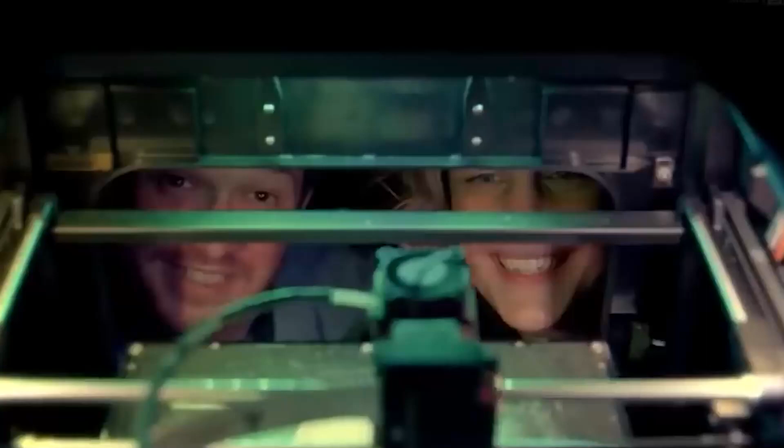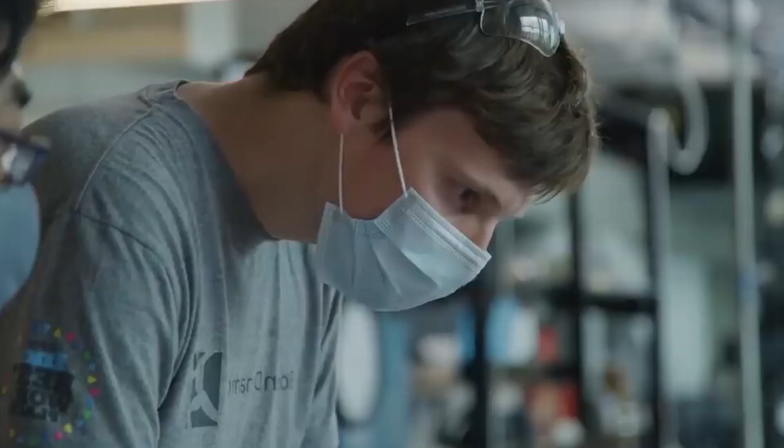What if I told you there's a robot that can run faster than Usain Bolt and navigate through rough terrain with ease? The world of Boston Dynamics is a fascinating one where technology meets art and the impossible becomes possible. Boston Dynamic robots are not just changing the game in the field of robotics, but also revolutionizing industries such as

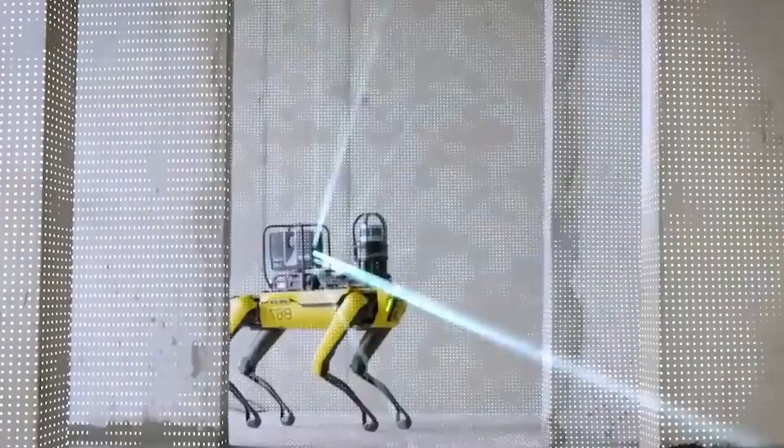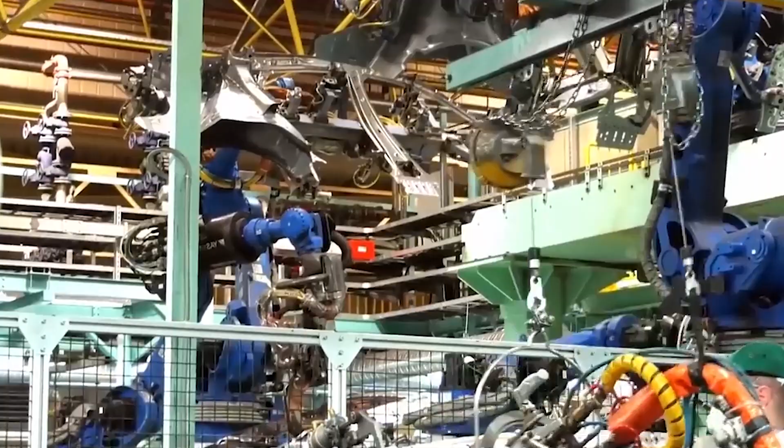construction, search and rescue, health, and even entertainment. Get ready to witness the future of technology as we take you on a journey with the most advanced robots on the planet. So, join us as we explore the revolutionary world of Boston Dynamics robots.

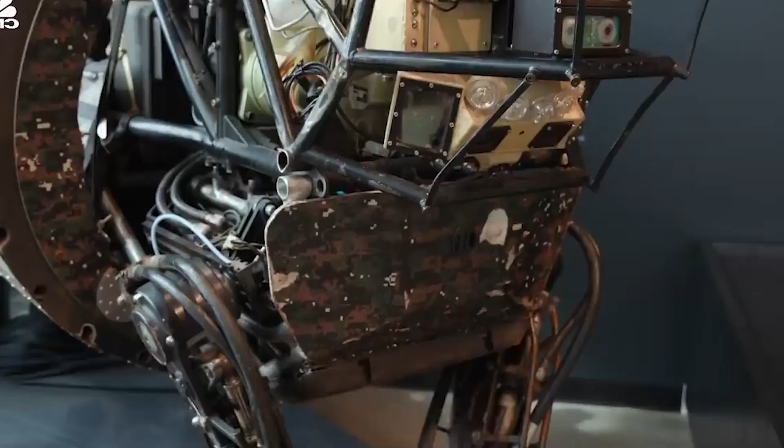Boston Dynamics is renowned for producing superb robots that improve people's lives by creating dynamically stable, leg-powered devices. The robot's unusual design enables them to navigate a terrain that is impassable to others and carry out automatic activities in chaotic settings. The company has created creative robots that have grown incredibly popular over time.

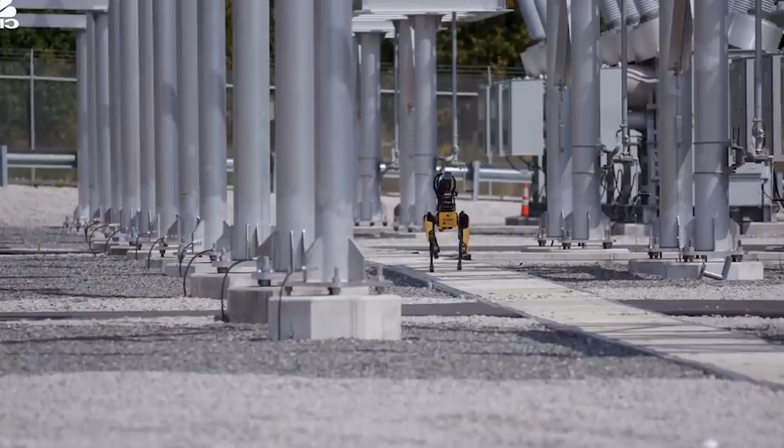For more than 30 years, Boston Dynamics has prioritized research and development. They have been supported for the duration of that time by extremely wealthy investors including Google, SoftBank, Hyundai, and initially the American military through DARPA funds. The results of all that study and creation are beginning to show.

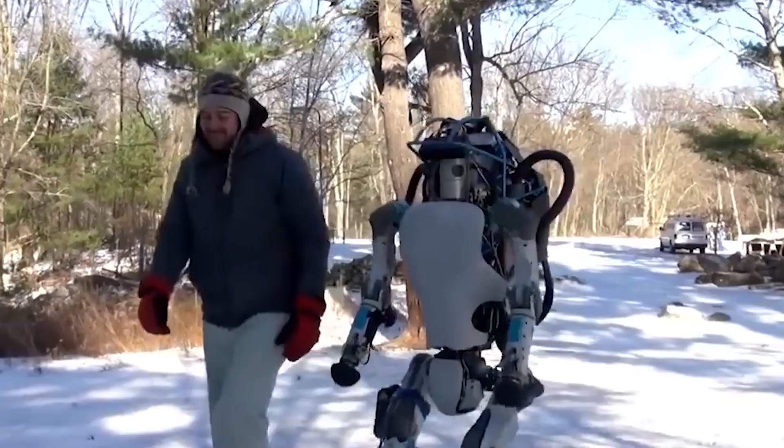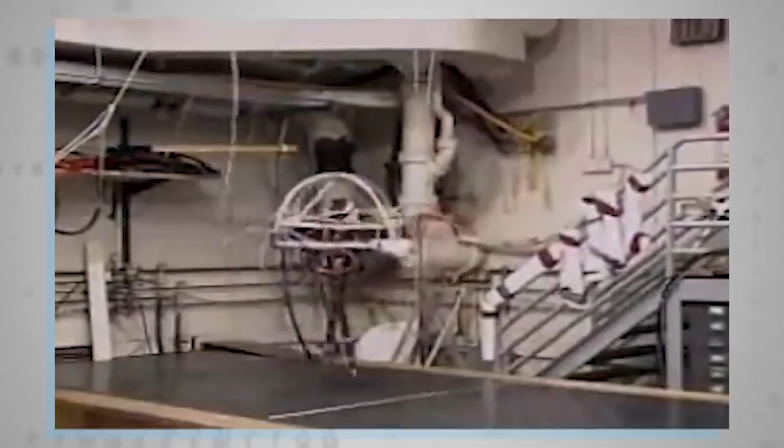Moving on, we'll discuss the top 10 robots Boston Dynamics has created that will revolutionize society.

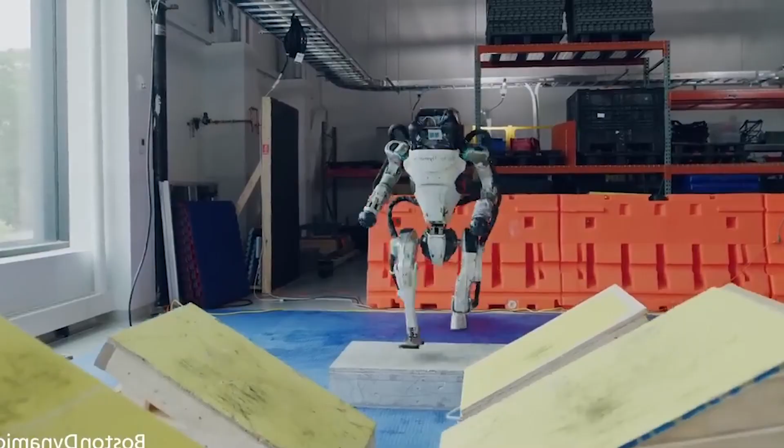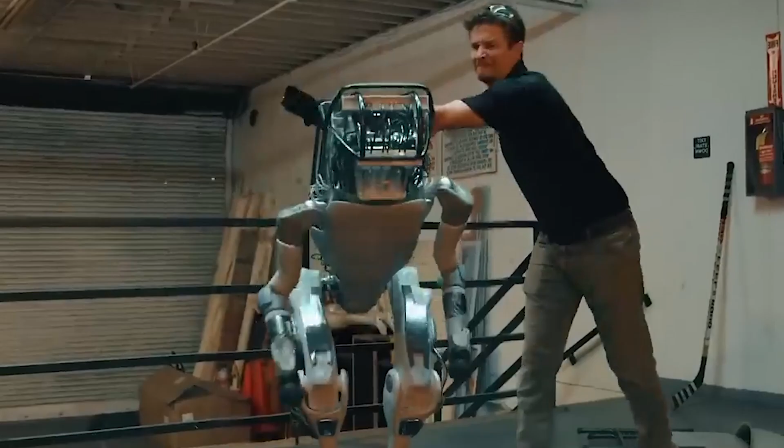Sit back and enjoy. Atlas is one of the most popular robots created by Boston Dynamics. It is a bipedal humanoid robot that was created by a number of tech firms and governmental organizations in 2013. Nothing short of amazing describes Atlas. It had a rocky beginning, but since then, it has advanced greatly.

By adding movement data to its motion libraries, it can develop and learn, and this includes trajectory optimization into intricate processes. Atlas has the ability to continuously sense its surroundings and adapt. While Atlas is able to move, jump, and crawl like the previous Petman, the depth and control of its motion are significantly more advanced. Without a doubt, Atlas will spare lives and cut out pointless labor and stress.

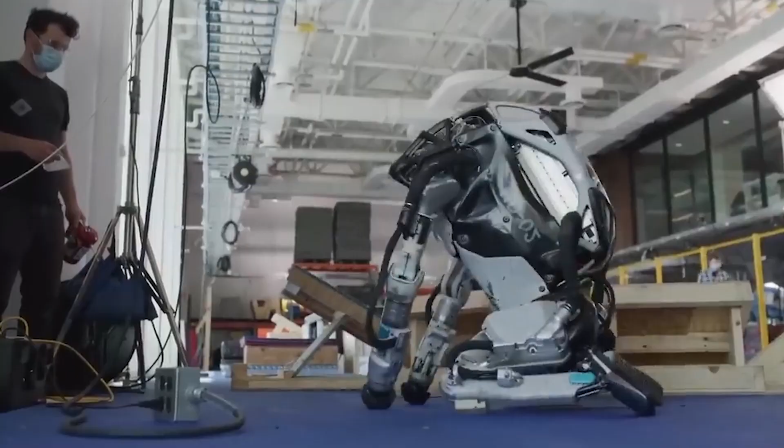It will be fascinating to see Atlas develop. Over the past 10 years, it has developed from a halting, lumbering gait on a level surface to sprinting through parkour courses and flipping over balancing beams.

The robot has whole-body dynamic balance and is made to work both outside and inside of structures. Atlas is electrically powered and hydraulically actuated, and its hardware uses 3D printing to reduce weight and size, resulting in a small robot with a big work area and a high strength-to-weight ratio.

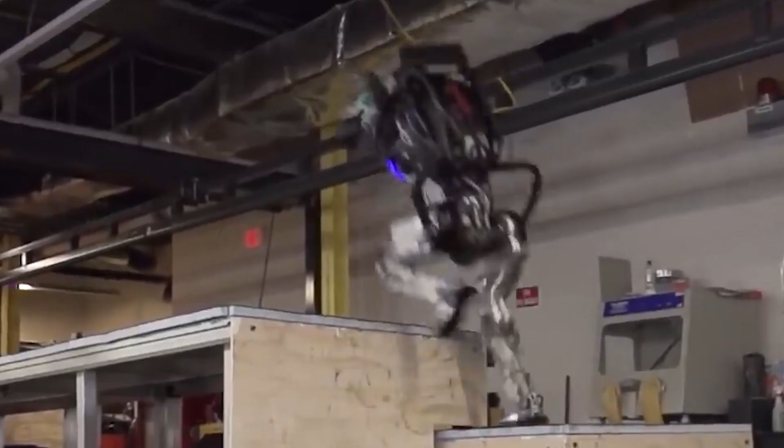Atlas can move objects in its environment and traverse uneven terrain thanks to stereo vision, range sensing, and other sensors. Atlas also holds its balance when jolted or pushed and can get up if it tips over. No doubt, this is one incredible creation.

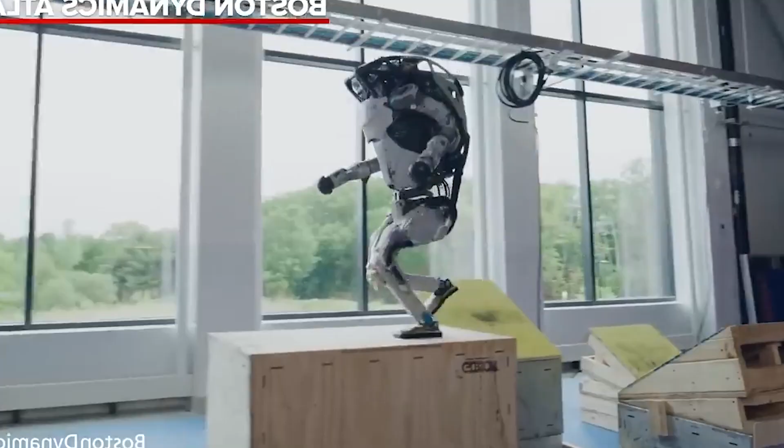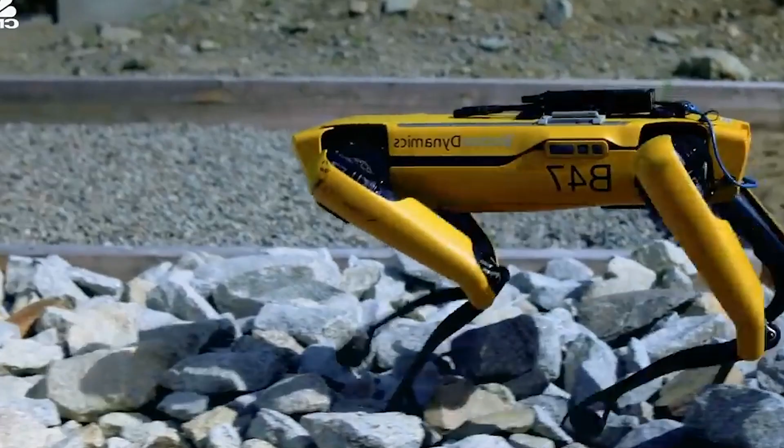The next one is another well-known design of Boston Dynamics. It is a quadruped robot called Spot, and it's employed in a variety of fields including oil and gas, security, search and rescue, and even construction.

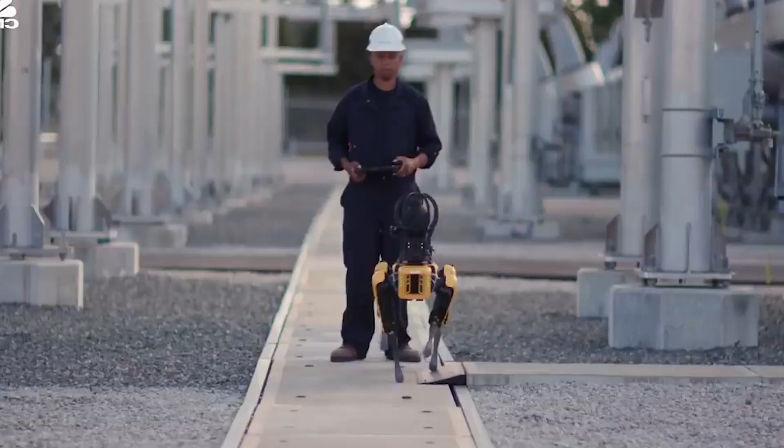However, it wasn't always such a plug-and-play solution, and Boston Dynamics recruited the aid of IT service provider Rightpoint to make it relevant for all of these use cases, enhance user experience, and reach full commercial viability.

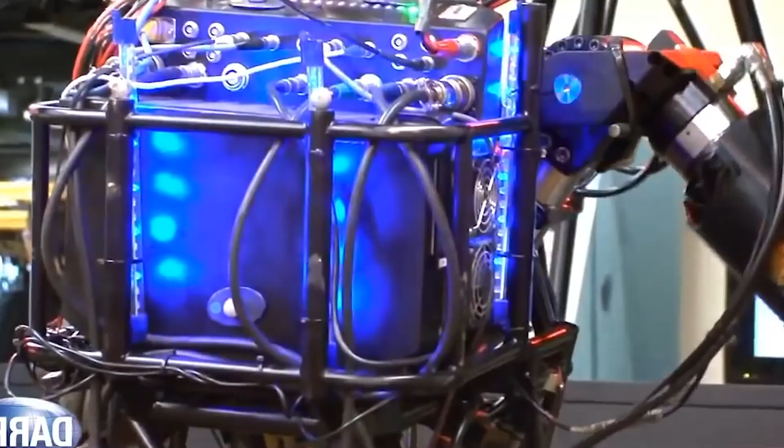Project Petman, also known as the Protection Ensemble Test Mannequin, was created in 2008 for the U.S. Army by a number of businesses and organizations, including Boston Dynamics. This device was used to test specialized gear that soldiers use to protect them against chemical assaults.

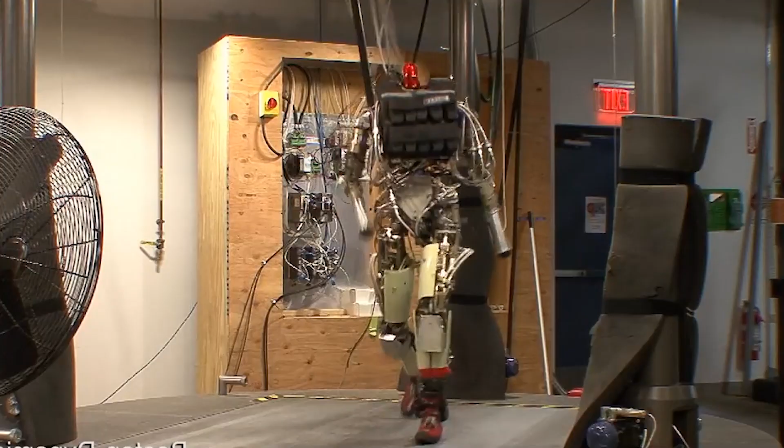Petman is made to work like a regular person. It is capable of standing, walking, crawling, and even certain calisthenics like squat thrusts. Without really placing a person in risk, these movements enable researchers to assess the protective gear in a way that would mirror an actual person. The mannequin has sensors all over it, and it can even simulate body temperature, sweat, and humidity.

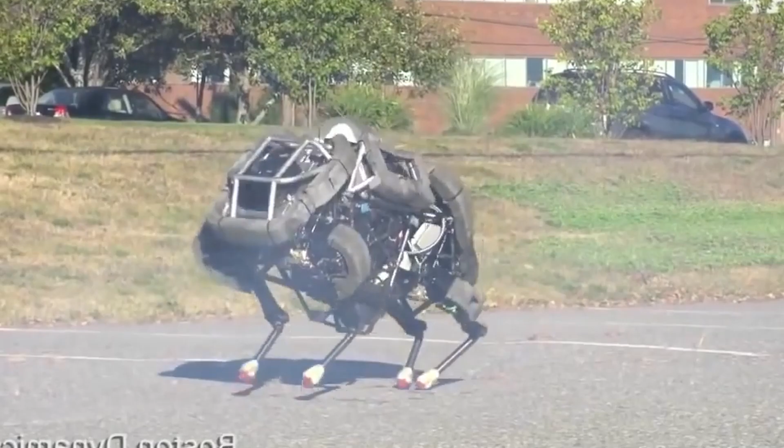Big Dog is another quadrupedal creation. It's a military robot that is dynamically stable. It was created in 2005 by Boston Dynamics, NASA, and the Concord Field Station at Harvard University.

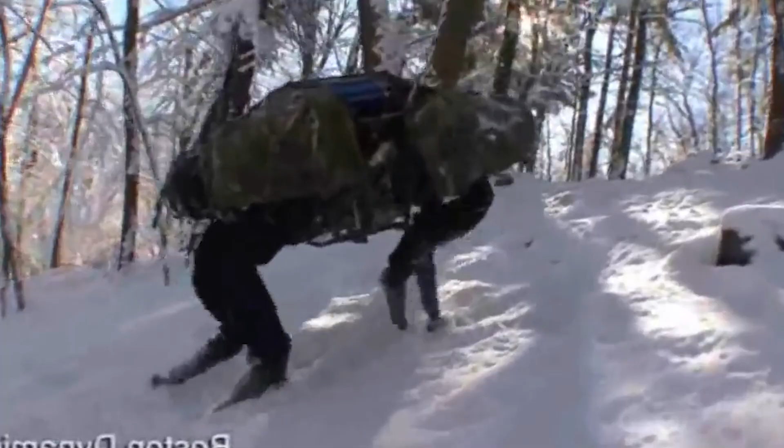The military was going to employ the Big Dog as a robotic pack mule. It was made to be both powerful and agile. Instead of wheels or tracks, the objective was to move across rocky and uneven ground on 4 legs.

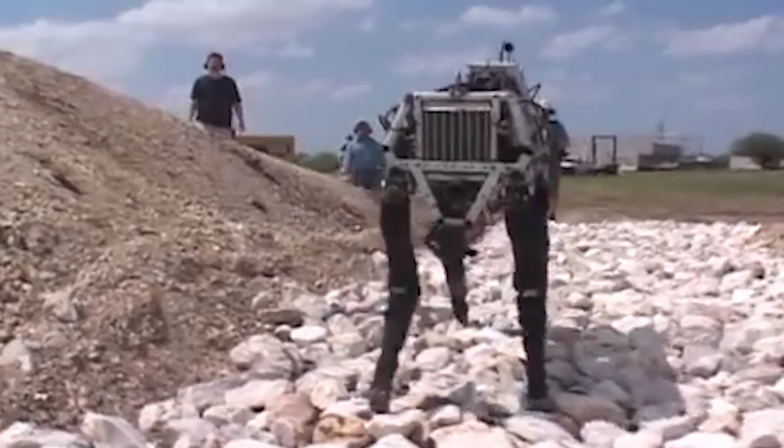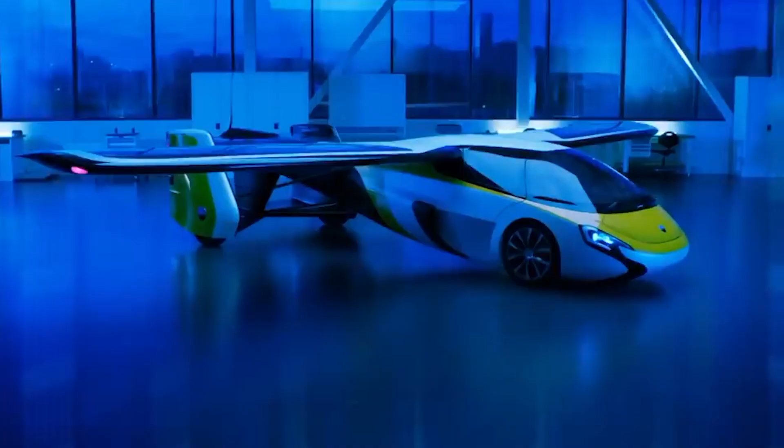The engine powering the Big Dog has been converted from a go-kart engine. The hydraulic leg actuators are driven by a hydraulic pump which is powered by the engine. The Pentium 4 CPU receives data from the 50 onboard sensors and uses it to control the system. In 2015, the Big Dog project was abandoned because it was found to be far too loud for practical use.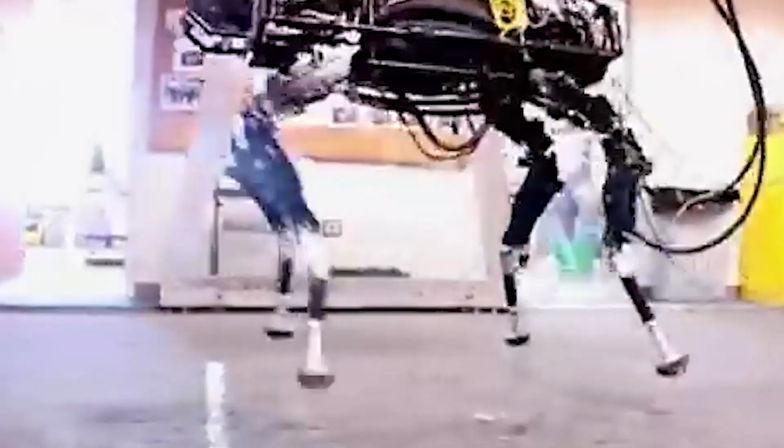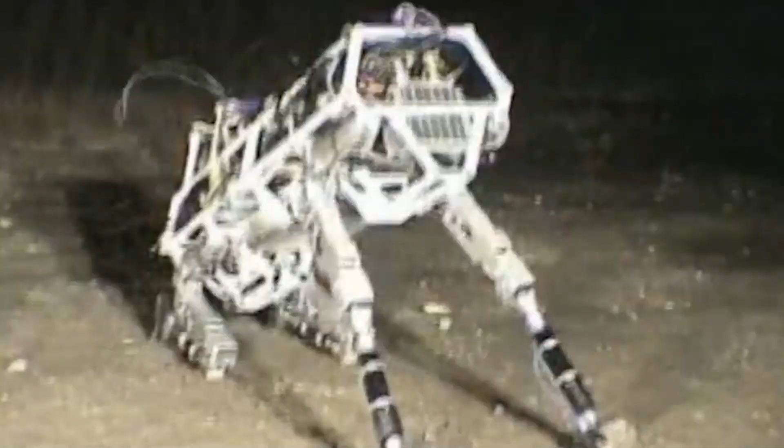Boston Dynamics created this four-legged robot to conduct studies on quadruped locomotion. As part of a DARPA-funded program on advanced robotics, Little Dog is currently being employed at the Massachusetts Institute of Technology, Stanford, Carnegie Mellon, University of Southern California, University of Pennsylvania, and the Florida Institute for Human and Machine Cognition.

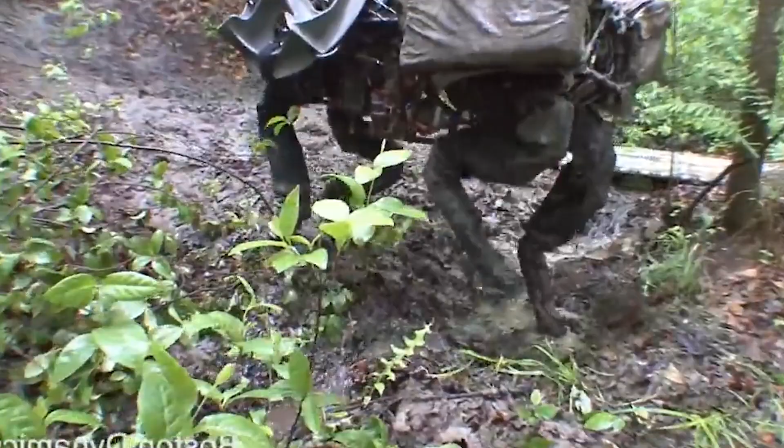Little Dog has 4 legs with a wide range of motion and 3 electric motors on each one. The robot is powerful enough to climb and traverse reasonably difficult terrain. A PC-level computer that handles communications, actuator control, and sensing is built within the robot. Little Dog can run continuously for 30 minutes thanks to its rechargeable lithium polymer batteries.

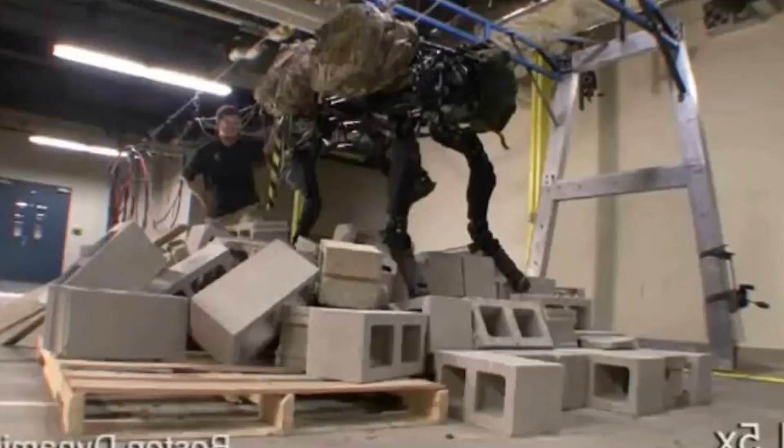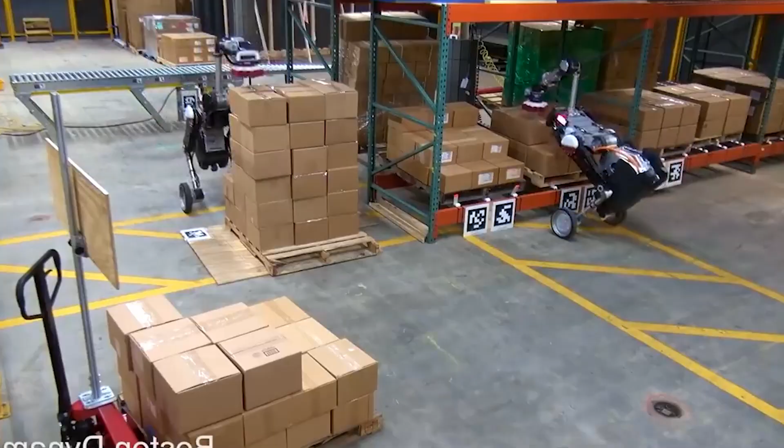Handle is a mobile robot that combines the effectiveness of wheels with the ability to navigate uneven terrain on its legs. It has a manipulator arm that can lift big boxes and is intended for material handling tasks. Additionally, it incorporates a swinging tail that aids with balance and dynamic movement in confined places.

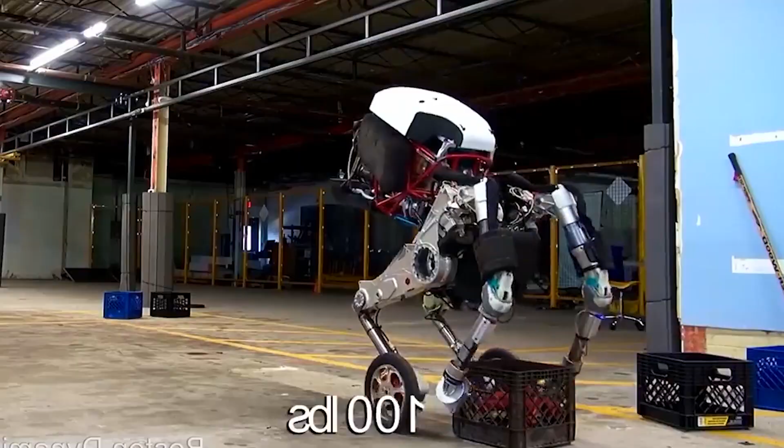Boston Dynamics unveiled a new version of Handle in March 2019. The new robot can pick up heavy loads while having a small footprint, which enables it to maneuver in confined spaces. It is designed as a mobile manipulation platform for logistics applications.

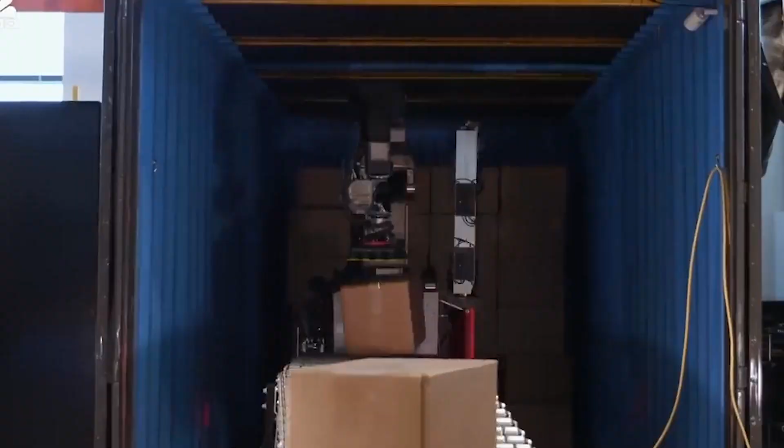In a warehouse, Handle may independently put together and take apart pallets while moving boxes weighing up to 15 kilograms or 33 pounds. Its onboard vision technology locates individual boxes for grabbing and placement by following marks on the pallets. Handle employs force control to nestle each box against its neighbors as it sets the boxes on the pallet.

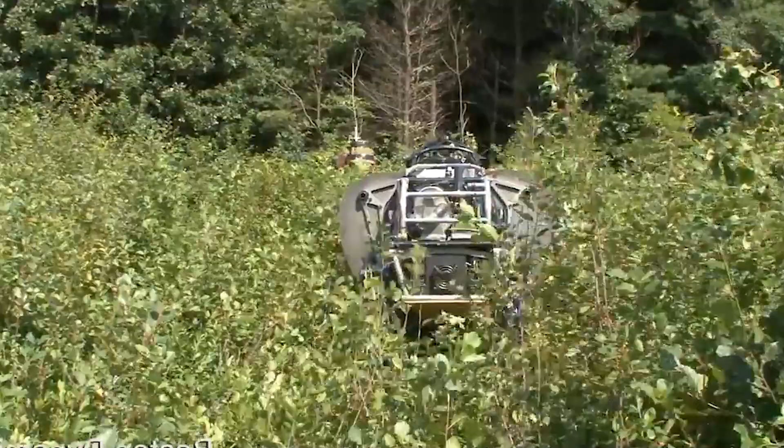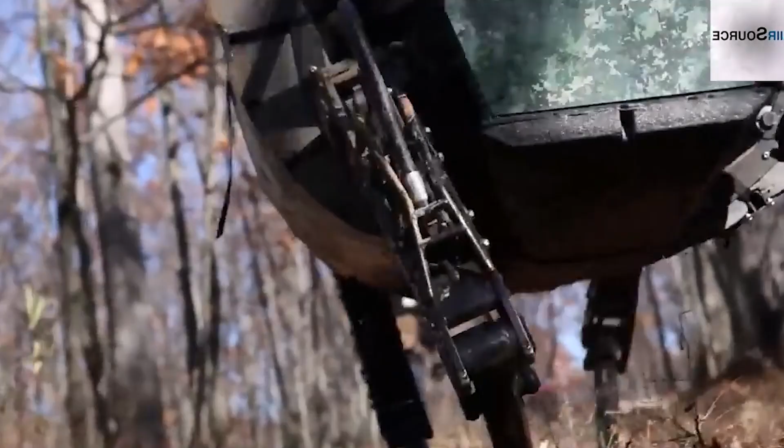If you're a member of the light infantry, you might have fantasized of a solution to lessen your battle load. With their invention, the Legged Squad Support System LS3, Boston Dynamics is seeking to achieve precisely that. LS3 is a rough terrain robot designed to go anywhere Marines and soldiers walk on foot by helping them carry their load. Each LS3 can carry up to 400 pounds of gear and enough fuel for a 24-hour, 20-mile mission.

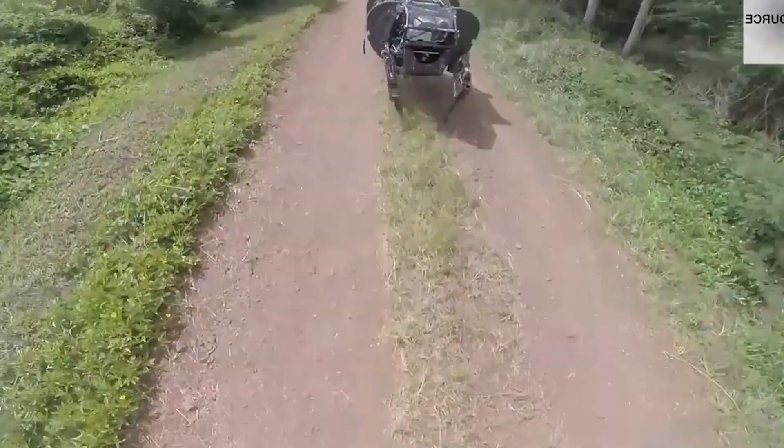Because LS3 uses computer vision to automatically follow its leader, it does not require a specific driver. Additionally, it uses GPS and terrain sensing to move to predetermined areas.

Stretch is the next version of Handle, a robot Boston Dynamics launched in 2017 that combines wheels and legs. Stretch is an omnidirectional movable base with 4 individually controlled wheels. This implies that the robot can be placed anywhere a pallet can fit.

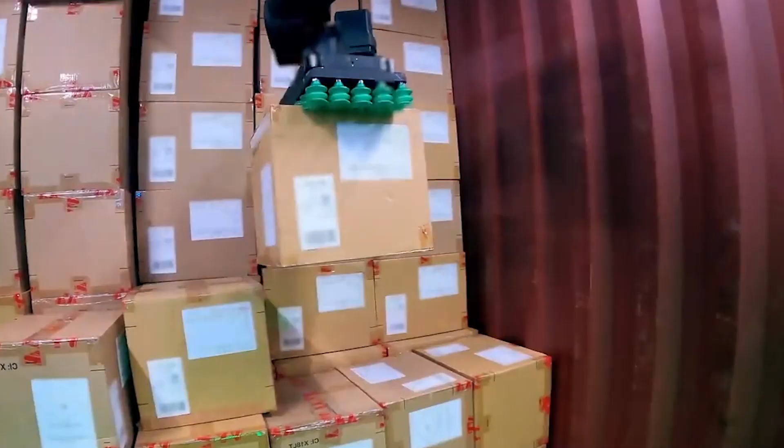Stretch is able to grab items from all corners of shipping containers with its extended reach of 6.5 feet and vertical reach of 10 feet, all without knowing how the container was filled or the specific contents of the packages. Stretch has an 8-hour battery life by default, but 16-hour batteries will also be available, as well as the option to plug Stretch in for continuous power.

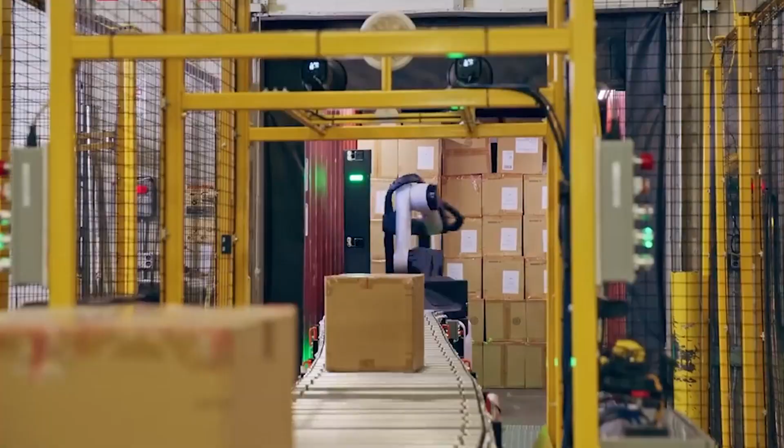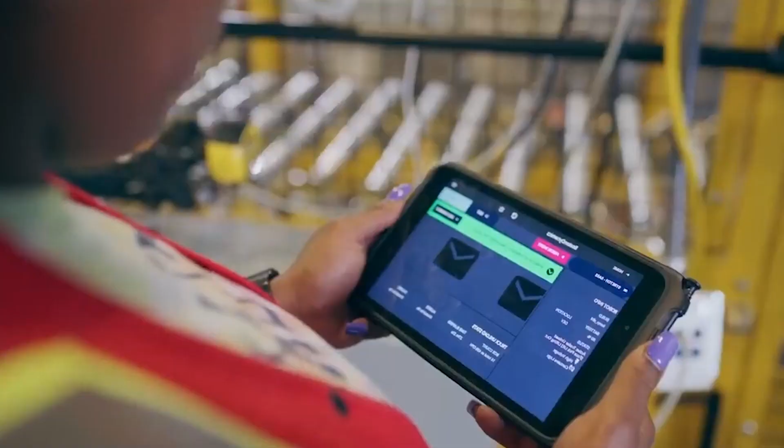Stretch makes use of the Pick vision system, which Boston Dynamics acquired in April 2019 when it acquired Kinema Systems. Pick performs robotic depalletizing using high-resolution 2D and 3D vision as well as machine learning techniques. Stretch's capability for dealing with a variety of boxes will be one of the important factors in success.

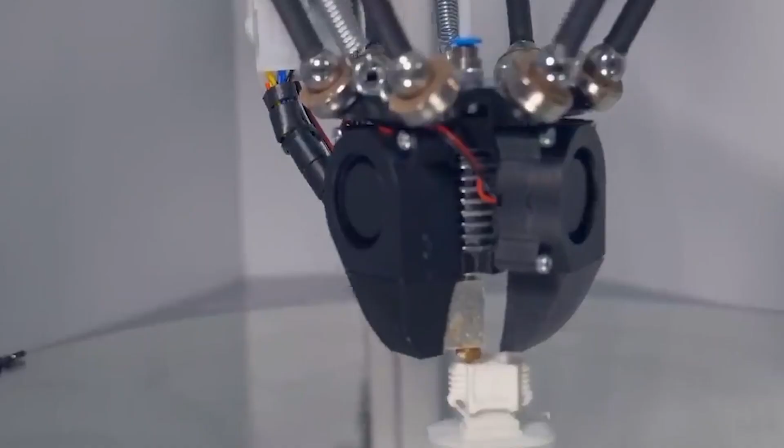Boston Dynamics' innovative and dynamic machines have completely changed the robotics industry. These robots have captivated the attention and imagination of the entire globe, from the agility of the Spot Mini to the human-like gestures of the Atlas.

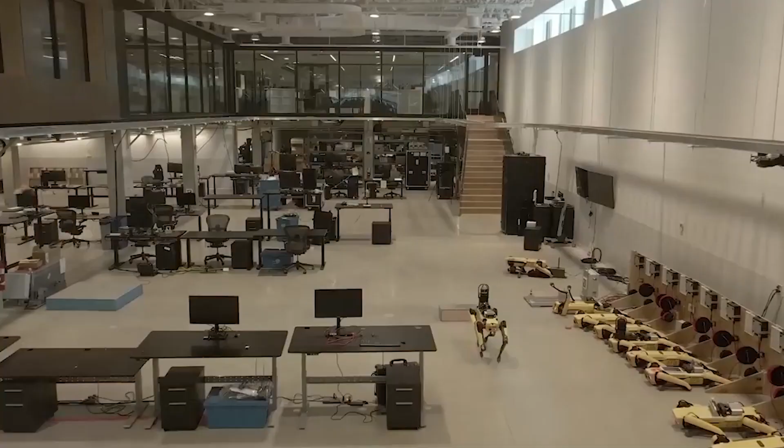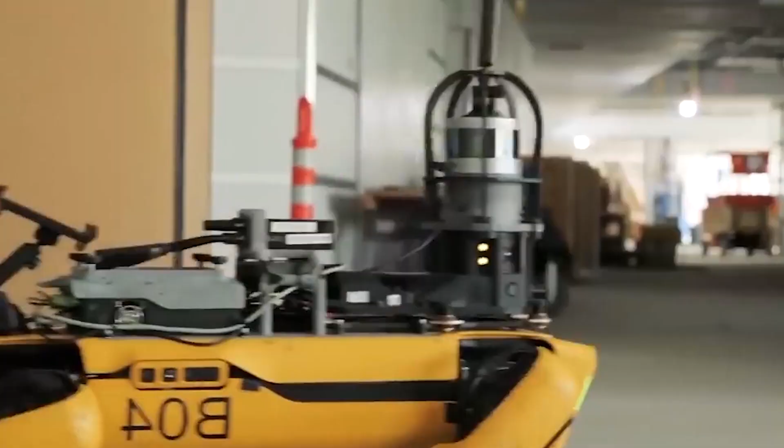It is intriguing to consider the endless possibilities and potential uses of these robots in the future as technology develops. Boston Dynamics has demonstrated that robots can not only carry out duties with precision, but also exhibit a level of elegance and fluidity never previously seen, whether it be in the fields of construction, search and rescue, or even entertainment. Overall, robots have a promising future, and we're excited to see what Boston Dynamics will produce next.